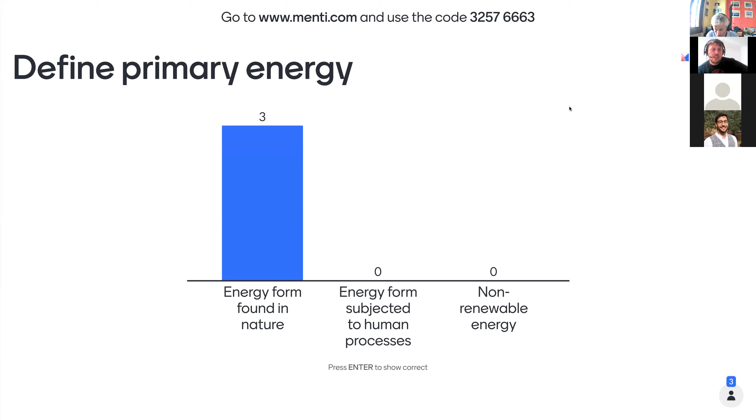So there is a question about last lecture, and the question is on the definition of primary energy, and you have three options. You see here the number of participants to the poll. I will leave you time for answering a few minutes until we reach, let's say, 30 participants.

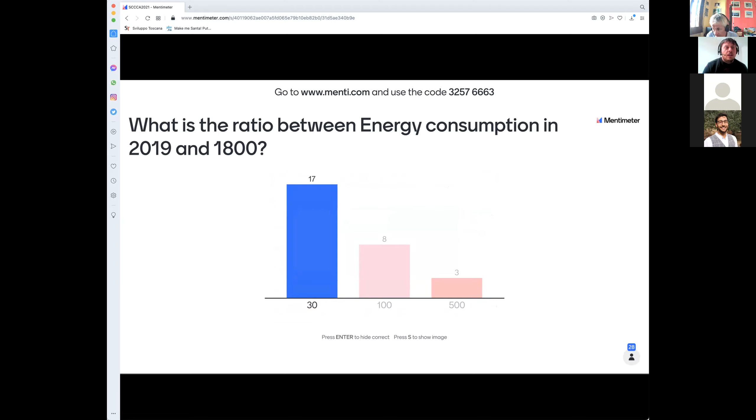So thanks for the poll, and just to briefly review the contents of the previous lecture, and then of course we will move to new topics.

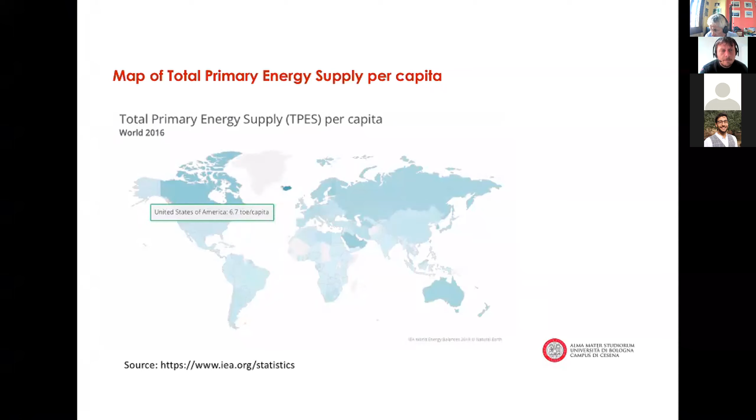So you might remember we were discussing the total primary energy supply per capita in the world. These are data with reference to 2016, and we are seeing here a very heterogeneous situation. There are a lot of diverse situations in the different countries, which is one of the main problems. If you think about it, the main problem is that things are so different in the different countries, and so a common solution is not easy to find.

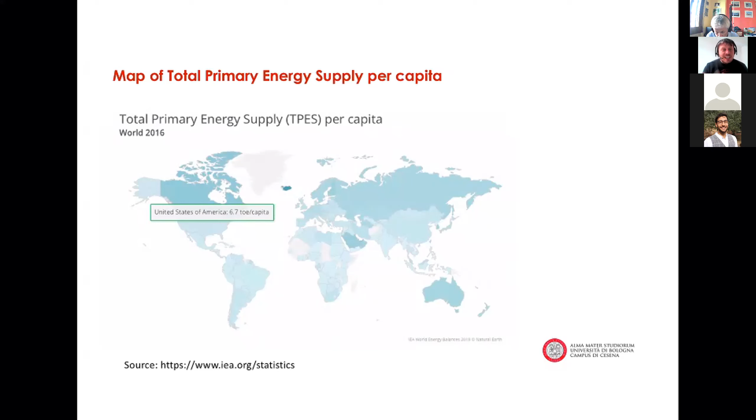So we'll delve into this data to show you pitfalls and fallacies. Once again, we will delve into detail of primary energy.

So for case studies, let's look at single countries. At first, of course, we are looking at Italy, and you see that for Italy, once again, numbers are in million tons of equivalent oil. In the last 10 years, there is a trend of decrease, but not so clear, because we have some kind of wave in the amount of total primary energy, which is the dotted line. Components show us that oil is still the first component, and it has just been reached by natural gas. Renewable, the dark green line, has increased, but still quite negligible with respect to the other components.

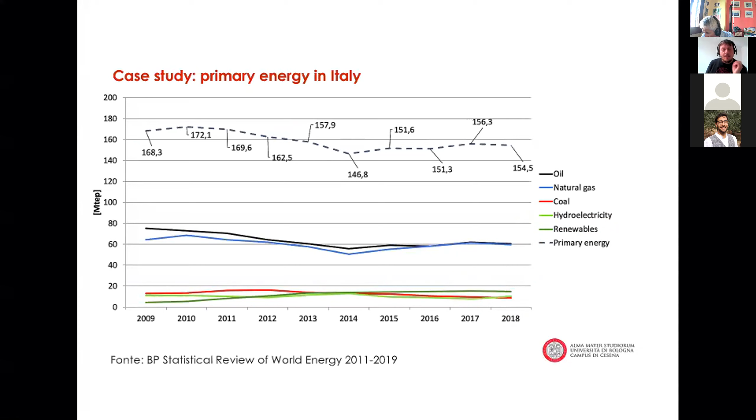Another case study is on Germany. Like for Italy, numbers are quite constant with a trend of slight increase here, while for Italy it was a slight decrease. But once again, you see that oil is the most important component for energy in Germany, and there are major differences with Italy.

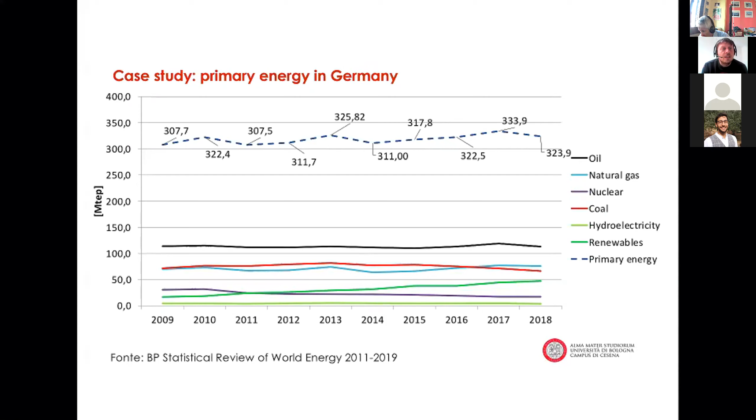So these are different pictures from different countries, and next will be USA. When it comes to USA, numbers are in overall picture quite equivalent to Italy and Germany, so Western countries have a similar trend, with almost constant consumption in the last 10 years, with some kind of waves.

Once again, numbers are quite similar to Germany, but maybe this will be impressive for you. Unless the storytelling is saying that Germany is performing well and USA is performing bad, numbers are saying exactly the opposite. In the USA, the consumption of coal has almost halved. So despite the storytelling that Trump was boosting coal, numbers say the opposite, which is always important.

Storytelling and news are one thing, but as a technician, as an expert, paying attention to real data tells the real things. And the real thing is that coal is decreasing in the USA, while in Germany it's increasing, which is quite nice.

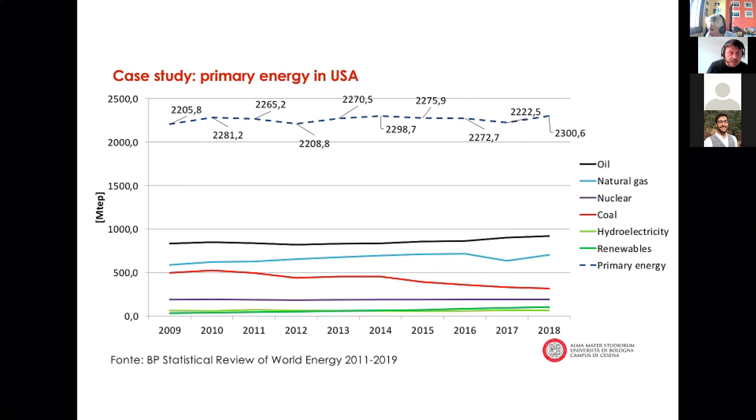In conclusion, we can say that apparently Pakistan is performing very bad, because in Pakistan we have an increase of energy consumption which is quite large. And in Western countries, with some differences, we have a pretty much constant trend.

However, this analysis is wrong, because basically, looking at the 4 countries, the overall contribution of Pakistan is very small, though the number of inhabitants in Pakistan is very high. So what I'm saying is absolute numbers can provide you fallacies, because what is important is the consumption per capita, which is exactly the benchmark on how a specific country is impacting energy and the environment.

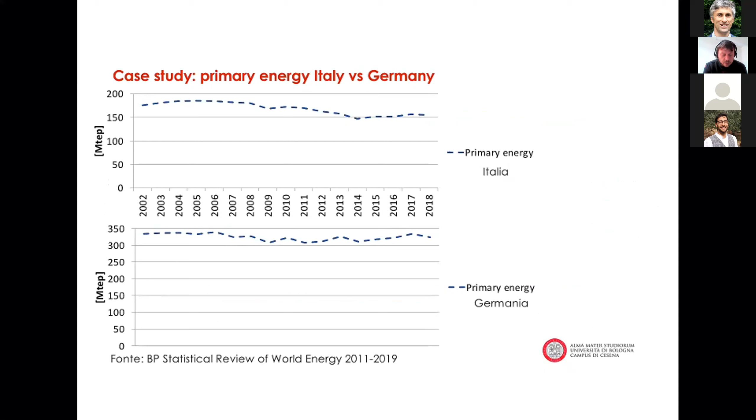This is just to say a specific comparison between Italy and Germany, showing pretty much the same behavior, even if in Italy, top chart, there is a slight reduction, while in Germany things are pretty constant with some waves. But most important is this picture.

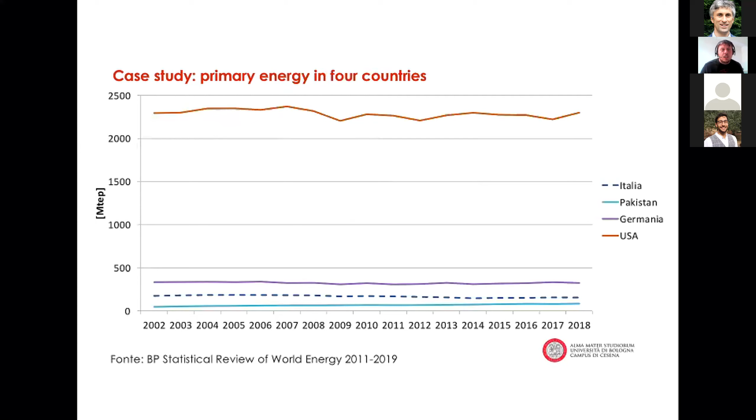So in conclusion, when you see this chart, you say, okay, this is the primary energy in the world. This is the same chart we had here.

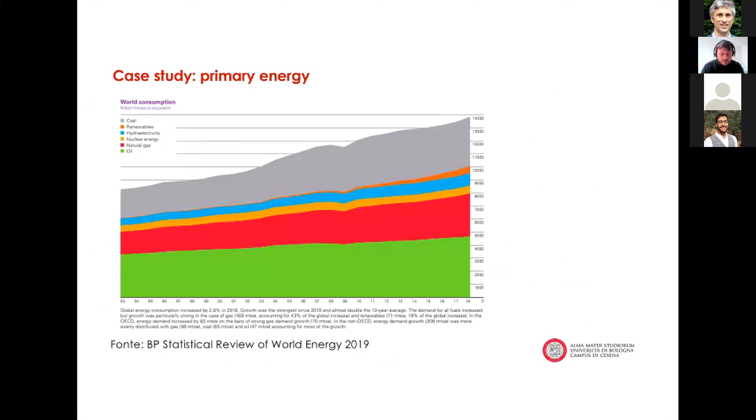We see a constant increase of energy consumption in the last years in the world. But when you look at this chart, you might think that the main responsible for the increase are non-OECD countries. So basically, OECD countries are USA, Europe, Australia, Canada, Western and rich countries, and non-OECD countries are lower income countries, but also Brazil, China, India. Looking at this chart, you might think that the main responsible for the increase of impact that is relevant, because we are basically seeing more than 50% of increase of energy consumption in the last 15 years or so, which is a huge amount.

So a very bad situation. You might think, okay, but Western countries are performing well because they are basically keeping constant their consumption, or even reducing it. And at the same time, non-OECD countries have almost doubled their consumption, starting from about 4,000 to 8,000.

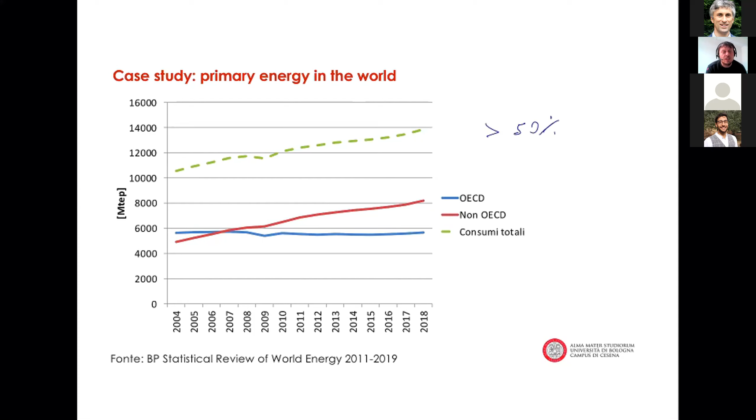But this is not the truth, because as we have seen before for the Pakistan case study, the situation is exactly the opposite. Countries in the red line are just increasing their level of consumption to a basic level, starting from very tiny, and the other countries are using a lot of energy per capita, and they are keeping this consumption very high. So when you look at the same data in terms of per capita, you see things very differently.

You see that in North America — and North America here is not only USA, so it's an average — they have started from 6 tons of equivalent oil per inhabitant in the 85-86 period. This level, from 85, is quite far in time, and this level is almost constant. So basically it was very high and is still the same.

On the other hand, you have other countries. For instance, this is Africa. The yellow is Asia. Of course China is here, and the increase is huge, more than doubling, but still not, as a reference to USA or North America, is still about one-third.

And at the same time, you see this is Europe, and yes it's decreasing, but not so strongly. What is really relevant is CIS, which is Russia, where you see the effect of economic crisis and other events that have led to some decrease, starting from 85 with a level close to North America, to now with a level close to Middle East and about Europe.

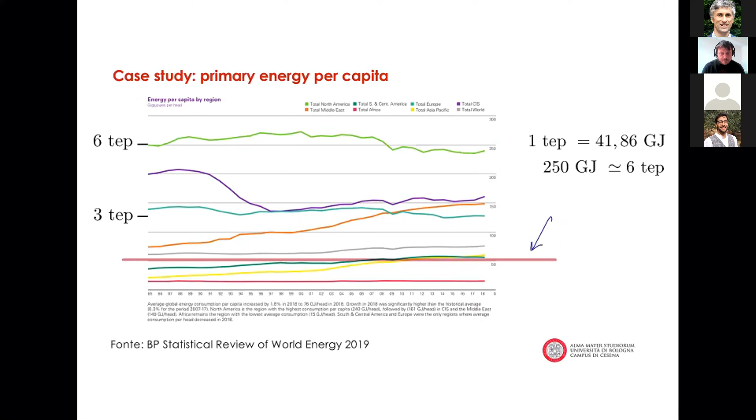I repeat, one of the hardest things to overcome is these differences, because of course it's very hard to find a common recipe, since everybody is starting from a very different point of view and everybody has different problems. So I repeat, in Pakistan their problem is to reach a level of enough wealth for surviving.

In North America, the problem is to decrease the level of wealth, which is far beyond what is necessary. Since we have to find a common rule, because we are a common spaceship, a common Earth, we have to fight a lot to find a single recipe, which is one of the hardest problems.

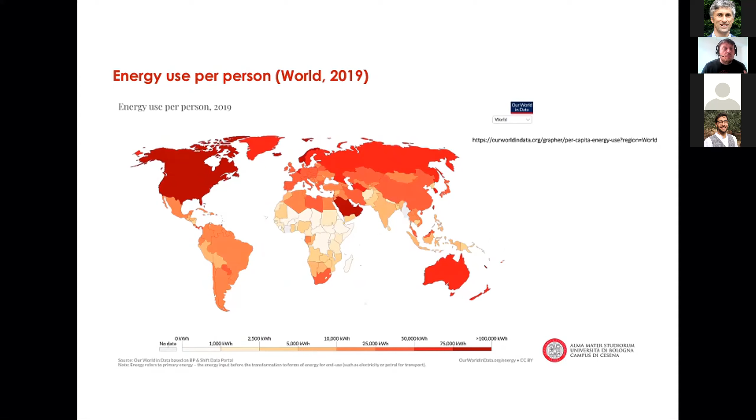This concludes the part of energy balance, and I'm moving quickly to the next section. The next section will be very quick, because you have already had a number of lectures that have shown how climate and energy are very strongly related.

Specifically, in 2015, there was a meeting you probably know called COP in Paris. COP21 in 2015 was a milestone in the history of humanity, because in that meeting the statement was very clear: climate and energy are a problem for humanity, and we have to fight it. The conclusion of this meeting was that climate change is anthropogenic, and the data you have seen in previous presentations are very clear and very scary.

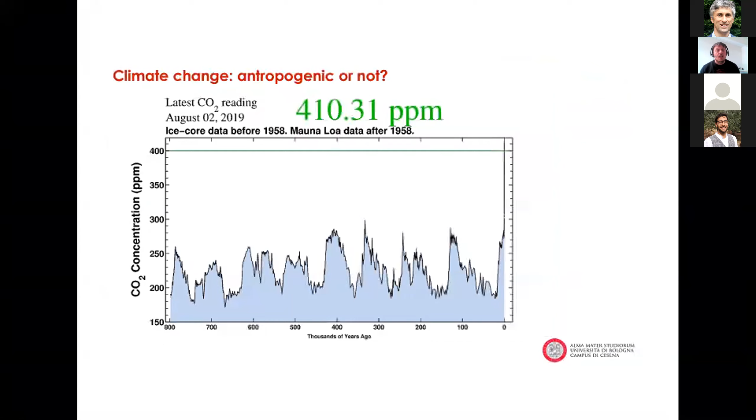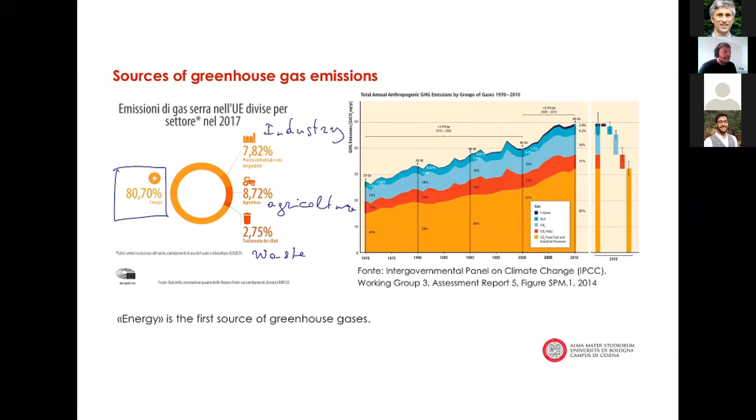But of course, actions have latency, so you cannot think that an action now has an immediate result, but it is still important to take action as soon as possible. So what is the answer? We now have, I hope, a clear vision of the problems and the potential solutions. The answer is very simple: use renewable energy sources, because we are not thinking of reducing a lot our energy consumption, since energy is beneficial to our community, to health, to wealth, to mobility.

So we are not thinking of zeroing the consumption of energy. This is very important. We are thinking of reducing the greenhouse gas emissions related to energy. To do that, you need to use renewable energy sources and not non-renewable energy sources, as we are doing so far. So this picture is very important.

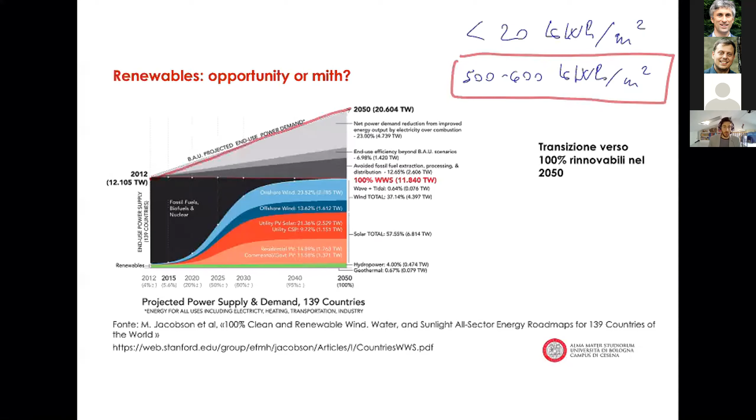There are many recipes, but the point is, if you look at this line, this is the BAU line, where BAU stands for business as usual. So basically, it means we are doing nothing. Everything keeps the same. We keep our houses, we keep our cars, we keep our usage of industry, social habits, and so on. And what does this mean? Without any action, the energy consumption will increase, almost doubling from 12,000 to 20,000.

But still, with action to reduce the energy waste - and this is the gray line, these are reductions created by improved energy output, by electricity over combustion, and end user efficiency. This means that we already have the technology to implement these solutions. End user efficiency means using better cars, using better houses, and net power demand reductions means using different technological solutions for our energy plants.

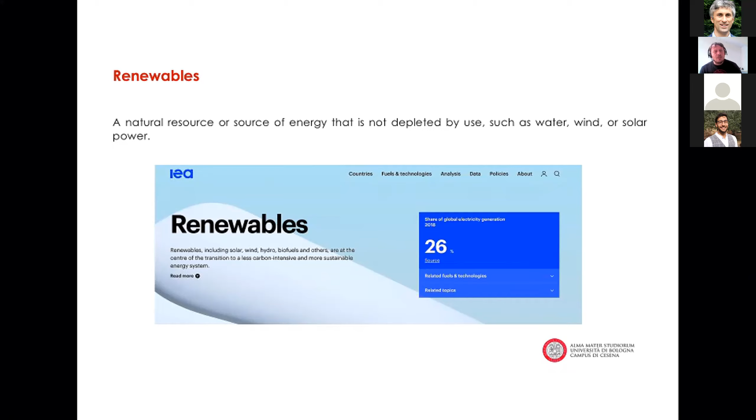I will try to provide you some basic description on the single technologies. We will briefly introduce, from a qualitative point of view, technologies for water named tidal, energy from sea waves, and hydro, and wind, and third, solar, which can be broadly classified into three types: photovoltaics, concentrating solar, and thermal panels.

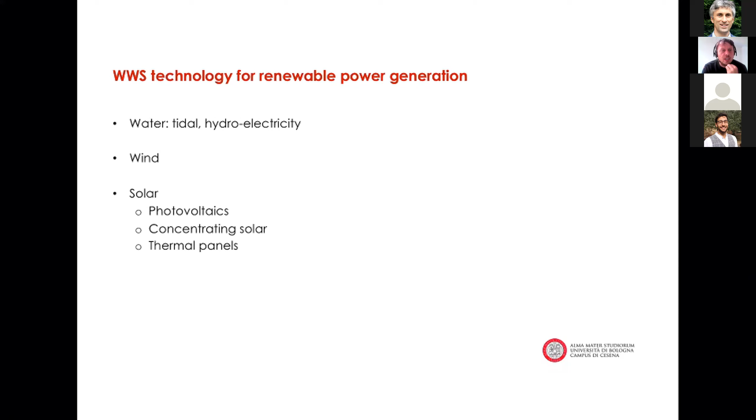As I said before, in order to assess the different technologies, considering as an example the problem of natural resources to build devices, we will use a benchmark - actually two benchmarks. One is LCA, which stands for life cycle assessment. It's very important to compare technologies during all their lifetime.

As an example, some of you have mentioned nuclear energy. What is the problem of nuclear energy? It's decommissioning - decommissioning for a nuclear plant may require 20 to 30,000 years. So when computing the decommissioning of a nuclear plant, numbers blow up. And if you want to make an honest comparison, you always see that nuclear is not competitive with the others.

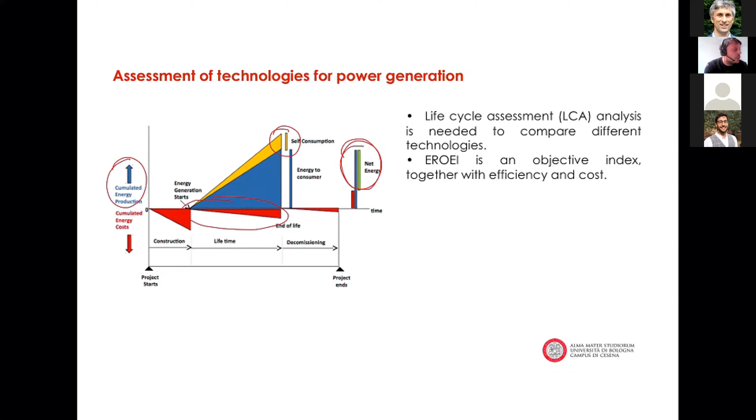So I hope you now have a clear picture of what is energy returned on energy invested, and I will show you some benchmarks to also answer the previous questions.

So these are pictures of energy returned on energy invested for several technologies. You see that in general, numbers are quite low. For natural gas, coal, and nuclear, the EROEI is quite low, around 5 to 10, meaning you consume 1 unit of energy for decommissioning, construction, self-consumption and losses, and with respect to that unit you have 10 times more net energy to the consumer. And you see that the most interesting technology is hydro.

Hydro is quite simple - you have only a turbine and then an electric machine for conversion of mechanical energy into electrical energy, as we have seen last Monday. Its energy return on energy invested can easily be larger than 80 - a huge energy return on energy invested. This is also because this technology's duration is very high. I already said that the energy plant installed by Tesla at Niagara Falls is still there after about 1 century, so you may understand the lifetime of this technology is very high.

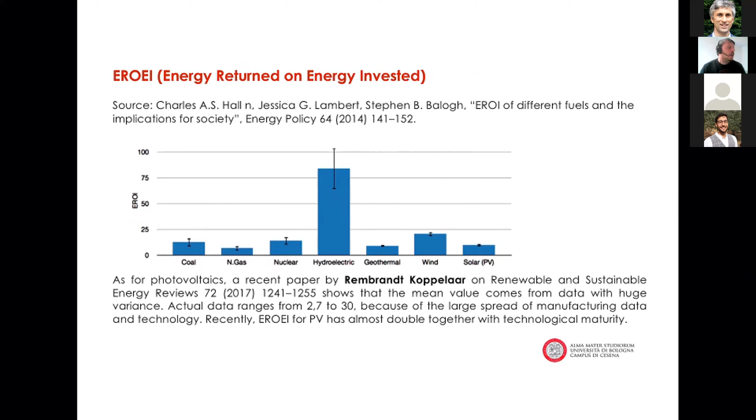At the same time, when it comes to solar or wind, you have better technologies, so the energy return on energy invested is improving. So the conclusion is, as an expert, as a scientist, as a technician, you have to know the methods. And the methods I'm providing you, use LCA and EROI to make your choices. This is the best recipe I can provide to you.

And these are, as I said, numbers for oil. And another important picture on the right - we were talking about raw materials. We were talking about rare earth for photovoltaics, but in general we must be aware that the problem of raw materials is a huge problem.

It's a huge problem because we are living in a spaceship where when a specific element is depleted, we don't have any more. When a specific species in the biodiversity is erased, is extinct, we don't have it anymore. So in terms of resources, numbers are impressive.

In 1990, we were extracting 50 billion tons of raw material. Try to guess how large is this amount of material we are extracting from the earth every year. In 2015, we are extracting more - 70 billion tons of raw material, meaning 27 kilograms per capita per day. Every day, each of us is extracting from the earth 27 kilograms of material.

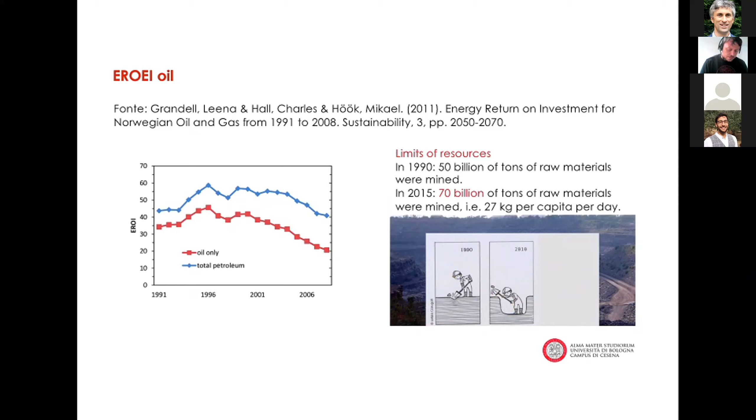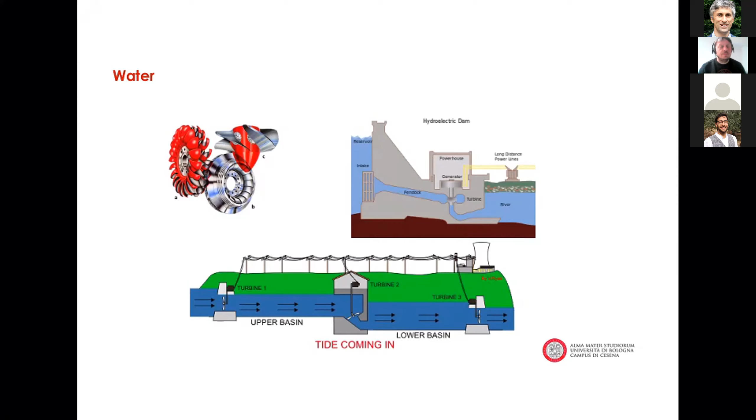So after this important analysis on benchmarks and raw materials, I move to technology - water, wind, and sunlight. What are the main technologies we have for conversion of energy from water? From water, we have two technologies. Top is hydro, bottom is tidal.

So tidal means a turbine. This is the turbine placed below the water. The sea waves make the turbine spin, and the mechanical energy created by the spinning of the wheel is converted to electrical energy.

Quite simple concept and quite simple technology. Remember hydro has the highest energy returned on energy invested, and of course tidal also. You basically require a turbine - a set of metal with specific form to provide the better conversion of fluid movement to mechanical spinning.

The same technology is used in hydro, where the mechanical spinning is produced by a waterfall. The waterfall produces pressure to a turbine. So in tidal, the pressure on sea waves is created by nature, and in hydro it's created by the waterfall.

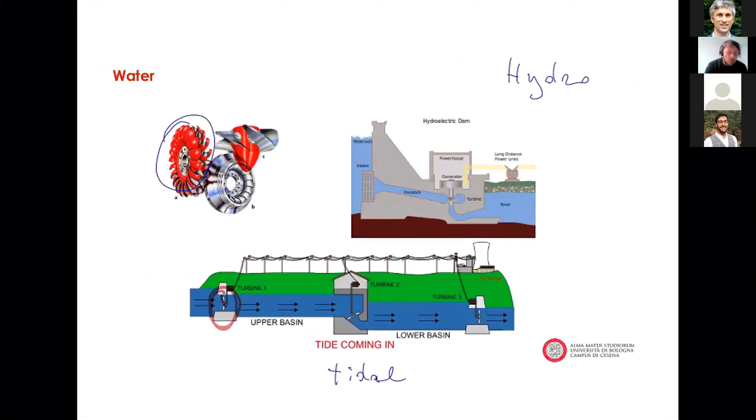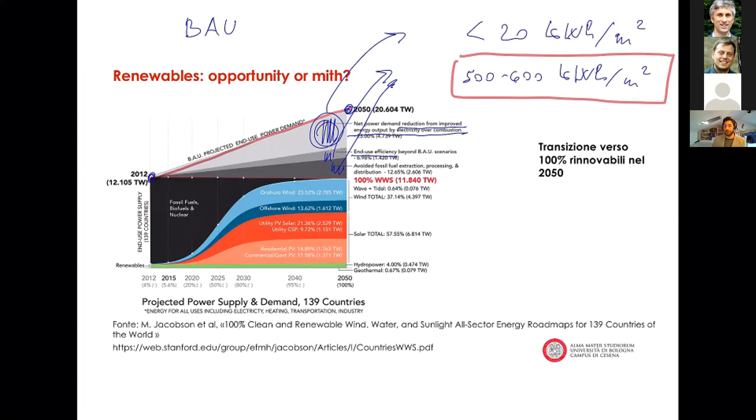Another question: I've heard that there is a global challenge to share electrical energy in excess that cannot be stored between states through a global network. Do you think that will be possible and useful? Yes, but there are some limitations. The limitation is that you cannot easily exchange energy at very long distances.

So it works in neighborhoods, it can be helpful, as an example, in a part of a city. Let's say that I have an excess of energy now because I have photovoltaics, and your house is close to me, we can exchange energy within the neighborhood. But at larger distances there are many issues, mainly caused by the distribution network, which is still not ready for this kind of exchange, and this limits global sharing.

But yes, sharing and storage and the so-called smart network is one of the open issues that we have, as was asked before, and I still haven't answered the problem on intermittence - I will do it in a moment.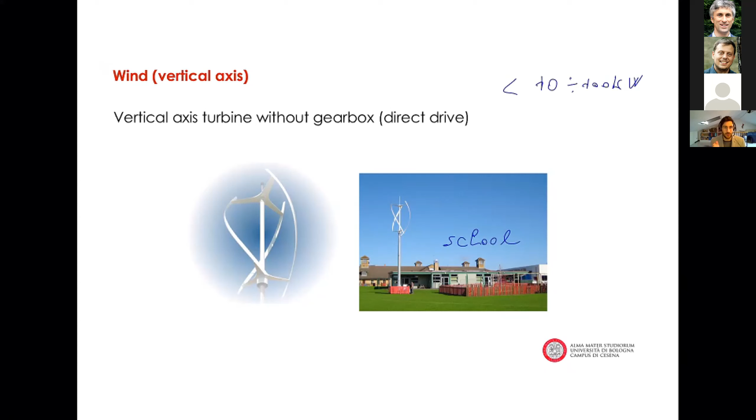Another short comment on wind turbines: we have all the technologies, so we are now capable of converting energy better than nature does. We have very strong capability. I will not delve into detail, but this is one of the top capabilities of engineering - you have mechanical engineering, electrical engineering, electronic engineering, chemical engineering, civil engineering. It's really the top of performance we have, and really it is a wonderful technology with impact.

We never say zero impact, it's not true - we are placing it in nature, we are using soil, we are preventing bird flow. So we are having a large impact with such an installation. But once again, you have to compare it with other solutions, and with effective methods decide for the best. This is the only thing I can say. And I repeat, we have the technology - the technology for that is really one of the best that engineering can provide.

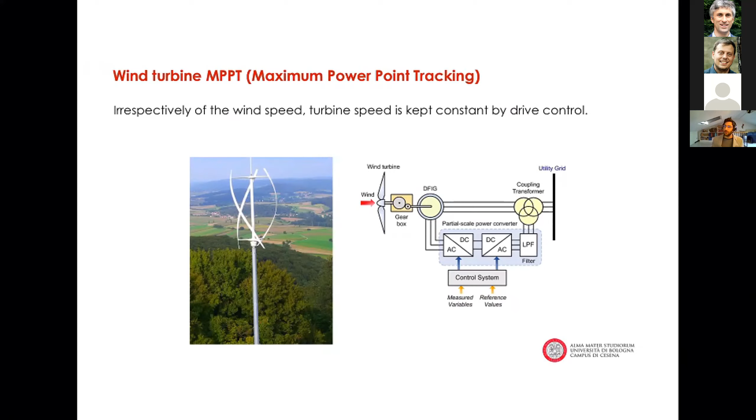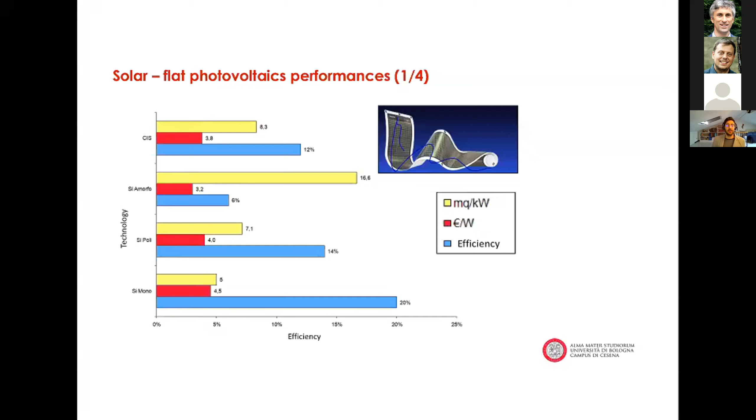Once again, in terms of efficiency, it's the other way around. So this has the higher efficiency, 20% of the solar energy is converted to electricity. Photosynthesis, chlorophyll and photosynthesis has less than 0.2%. So this is just to say we are performing much better than nature, and we have so many different solutions.

These are other specific examples - flat film, monocrystalline, and polycrystalline. These are the same as before, just to make you picture and recognize them. Monocrystalline is very, very simple structure. Polycrystalline is heterogeneous, and amorphous flat film is flat and flexible.

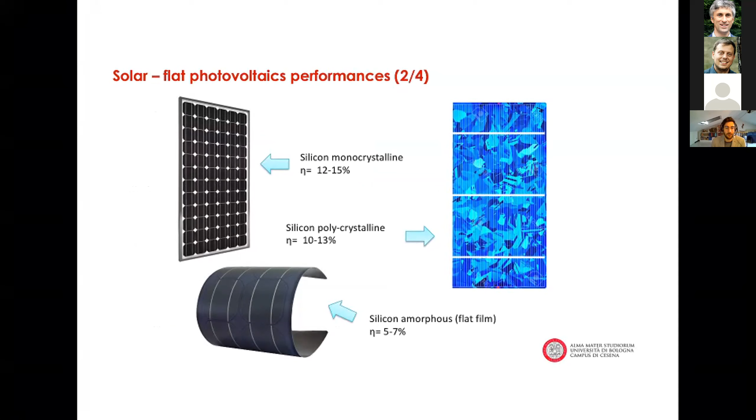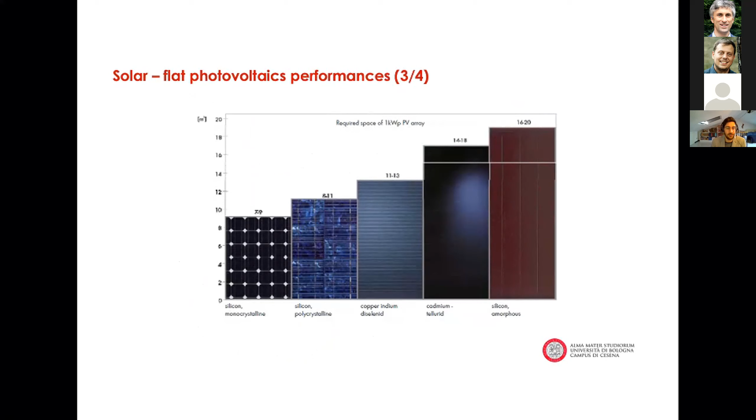And these are another way of seeing the same - how large is the space required for 1 kilowatt? You can see here that with monocrystalline you have the same power, 1 kilowatt, with small size, but with amorphous, that is flexible, you have larger size but different feature. And this is the trend, the history of solar performances.

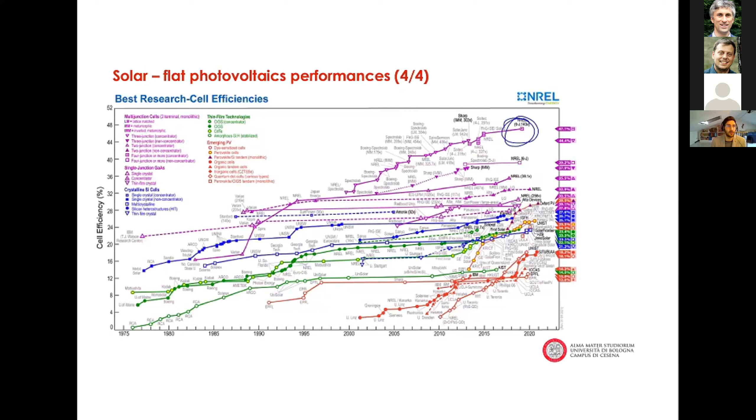And this was solar. For solar, I remember that the technology is based on the photovoltaic effect. This was discovered by Becquerel about some more of a century ago. And it is incredible that about 20% or more of energy can be converted into electricity. So basically, photons are converted directly into electrons. And this is the magician, which is not magic, but it's science behind this process that works very well.

And of course, how can we go as high as 50%? Because we are merging different technologies - multi-junction means using different materials, each of them use different wavelengths of photons. And so using them together, you go as high as 50% of conversion in energy, which is really amazing. And solar is not only photovoltaics, solar is also thermal power.

You remember last Monday, we have seen that every energy plant is basically made of 3 steps: heat, heat converted to mechanical energy by a steam engine, and then mechanical energy converted into electricity by an electric generator. So 3 different processes, 3 different cells in the matrix of energy conversion.

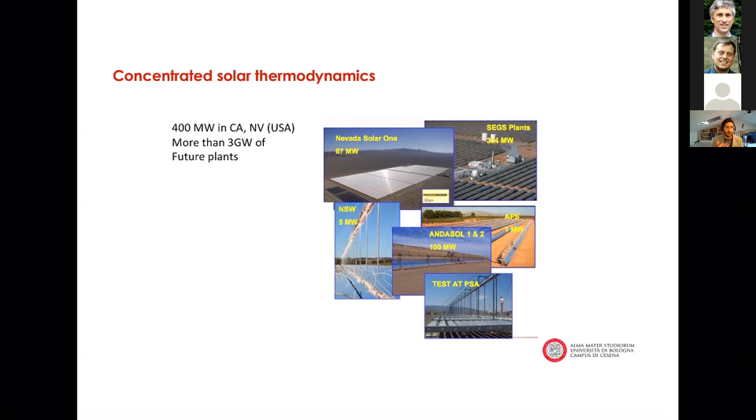And of course, the nice thing is that you can use photovoltaics or even solar thermal. We have solar thermal devices for rooftops quite easily.

In our installation, so we were talking about dams before - here we have the same problem. If we are using land to install new panels, this is not a very good solution because of course the panel uses the energy of the sun, so you do not have sun energy for the crop. So you are placing an impact on the ecosystem, not as high as a dam, but it is an impact.

So of course it would be preferable to use existing urban areas, and we have many existing urban areas. So it's very easy to use photovoltaics in existing land use, without reducing the land use for agriculture or for nature. That is a very, very important aspect I want to address.

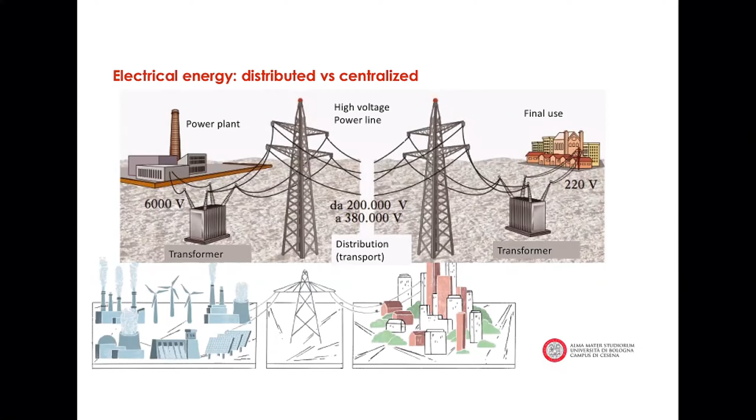So here we are, we start the last part of the lecture and the last part of this specific topic on climate and energy. So the point is renewable are available, but it's not easy to embed them in our energy system. The reason for that is quite technical, so I will try to be as simple as possible to explain why it's not so easy to embed, to integrate renewables in our electrical system.

So the electrical system can be thought of as a river. Electricity is like a river, let's say a closed river. So there are some sources providing water to the river, and there are many users receiving water from the river. And of course, the level of the river must be kept constant, instantaneously, as I said last Monday.

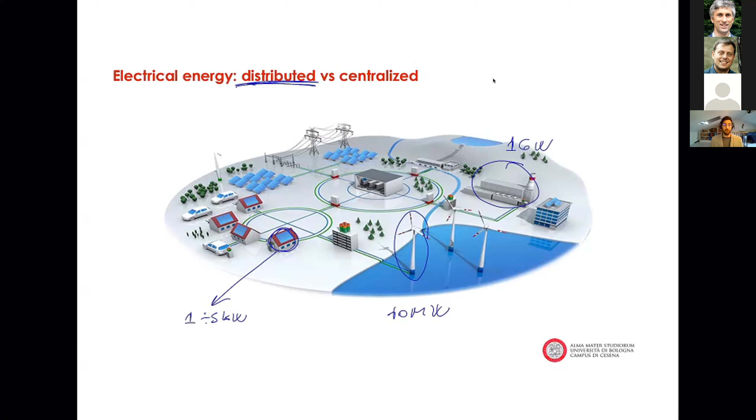Distributed means you have many different small sources. As an example, a photovoltaic on a rooftop has about 1 to 5 kilowatt. So very small, but distributed. Many sources. But the house is producing and using energy at the same time, so it's a so-called prosumer.

Prosumer stands for producer and consumer. This is a prosumer, because you are doing both actions at the same time. So in your house, you are producing energy with your solar panel, but you are also using the energy coming from the power lines. And why?

Because there is a time difference between production and use. As an example, you are producing a lot of energy at daytime, but you might need energy at night for your appliances, for your washing machine. And at night, you do not have energy produced by the photovoltaics.

So you need the power lines to cover the time difference between production and use. But at the same time, when the photovoltaics is working, at noon, and nobody is at home, and the washing machine is not working, there is probably a surplus of energy. So you are producing more energy than what is required in the house. So you are a producer, selling the energy to the network.

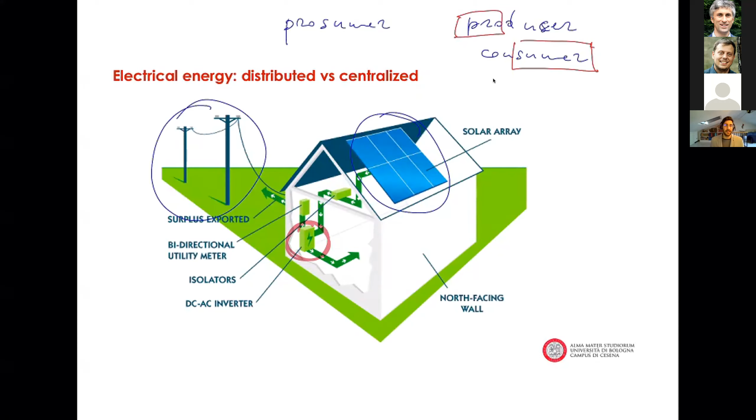You could install storage in your house, meaning a battery. For example, you produce a lot of energy at noon when nobody's home, you store the energy in the battery, and then release it at night time for your washing machines or other appliances. This is local storage.

But you also need system storage. As an example, a storage here to store the energy of different small users, different small prosumers, and then reuse it in the grid. So basically the grid has changed. It requires new things: storage at local level and intermediate storage to provide a distributed system that can work with different levels.

Of course, this is the major problem, the major system hindering the transition, because it requires investments and changes in the power lines and in the energy system that is all around the world, requiring huge and massive investments.

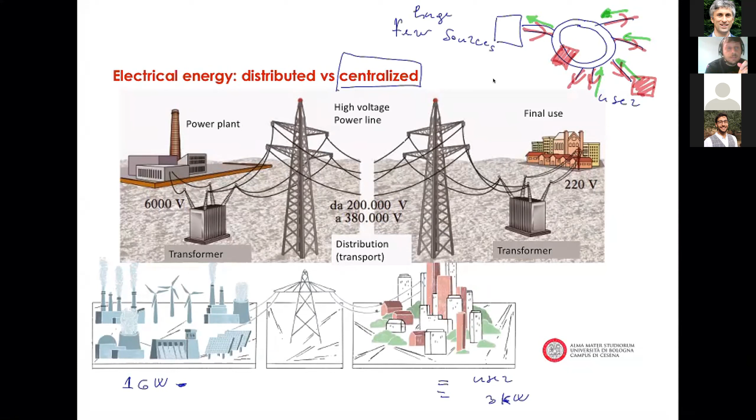Somebody said batteries are expensive. Yes, batteries are expensive, but we could think of an intermediate solution. As an example, you could use your electric vehicle battery, your car, provided it's an electric vehicle with a very large battery, for storage, using and storing the energy in some conditions.

But this requires many social actions. As an example, we should realize a system, as said before, with a share of energy excess. So we must be ready for laws and social implications of sharing energy with others. It's not an individual system, it's a shared system. At the same time, we should get used to sharing cars. It's not easy to have such a model with individual devices, but it's quite possible with sharing methods.

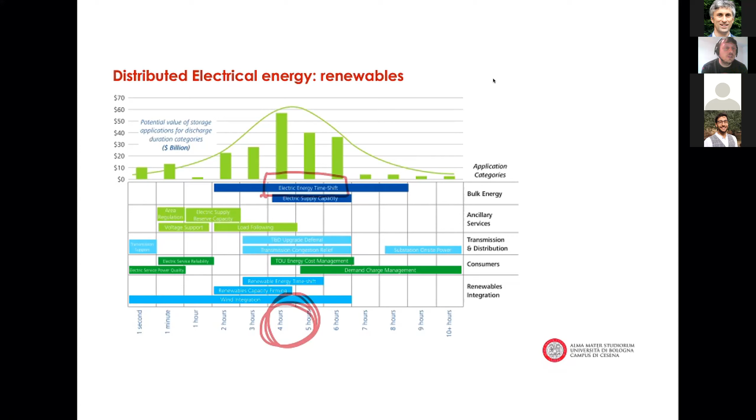Many of them are already installed at intermediate level, at the level of cities or plants. But we have to change the energy system, to move from the current centralized electrical energy system to smart grids. This will be the enabling technology. Smart grid and energy storage are the enabling technology for renewables. This is the missing piece, the investment we have to make now that will enable the transition to renewable.

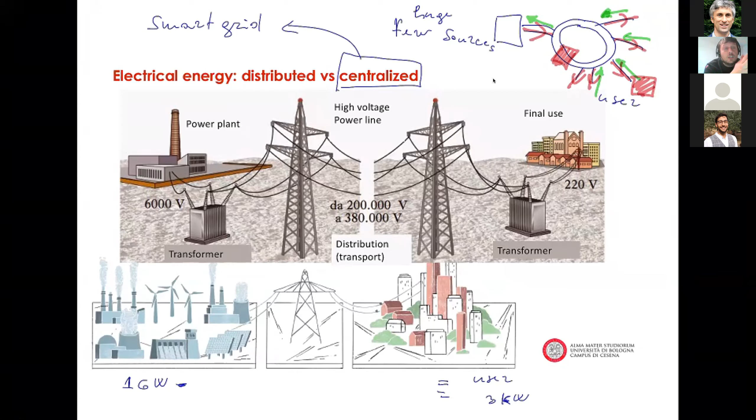I'm always surprised that almost nobody talks about it. You always hear of transition, you always hear of renewables, but hardly ever smart grid. But this is the real missing piece, the enabling technology that would allow the real transition to renewable, because then you can use your house as a prosumer, use renewable everywhere, and switch from the current fossil fuel-based energy system to a renewable-based energy system. Technologies are viable, but we need social and technological change based on smart grids.

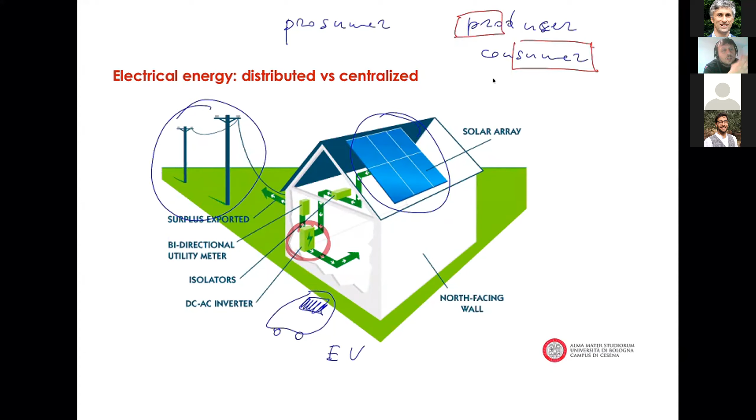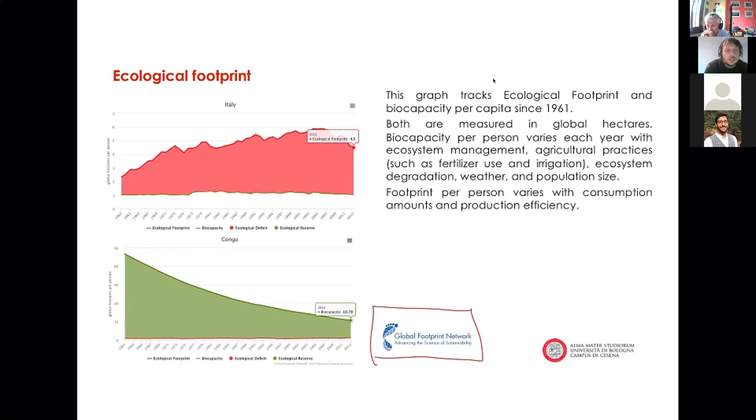And as a conclusion for you, please test yourself. Test yourself and you will see how many earths you require. Typically in Italy, we are using 2.5 earths, because we are using resources from the past and we are using more resources than we have in our own country. But test yourself, you won't be surprised if your answer is 4. It depends on you, on your lifestyle, on your impact on the different patterns of biocapacity. Please do so, it's very interesting.

Thank you, this is the last part of my lecture. So I leave the floor to Alberto for conclusion and then to open for next lectures.